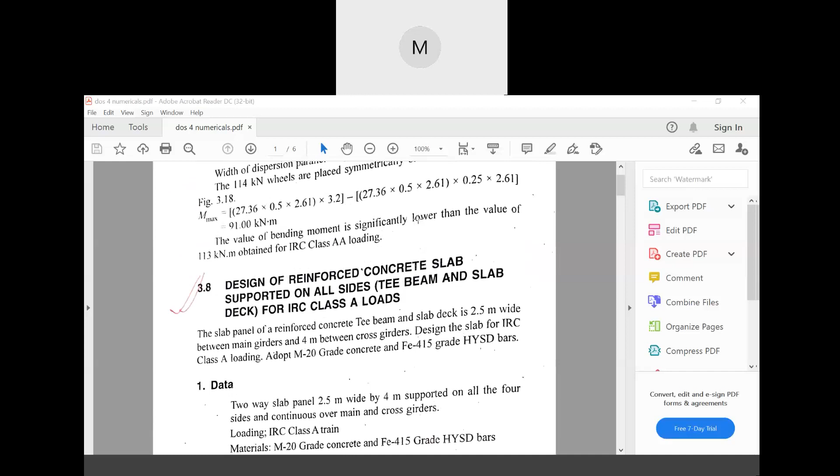Now, let us see here. Design of RCC slab supported on all sides for IRC class A loads. The last numerical was for IRC class AA loads, so this one will be IRC class A load.

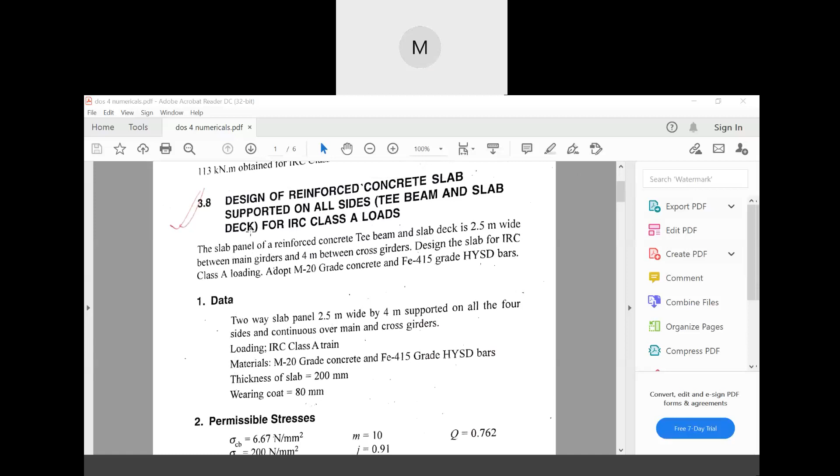So yesterday we discussed the data given, then the permissible stresses given. Now let us see, if you look at the figure, first of all what happens.

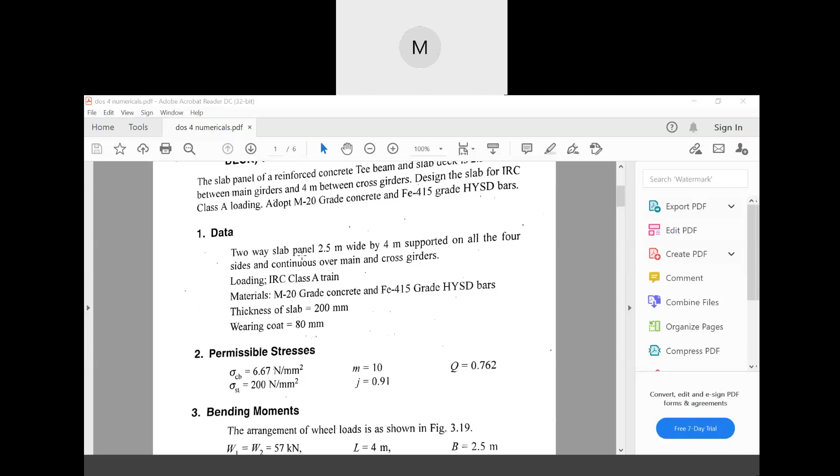So first of all, in this numerical, in figure 3.19, if you can see here, the IRC class A loading pattern - that means the two wheels will be like this, W1 and W2.

Okay, so this is the slab. Dimensions of the slab are given. Now if you can see here, this IRC class A loading pattern - this width, 0.66, 0.41, 0.995, everything - you will be able to find from the IRC class A load diagram.

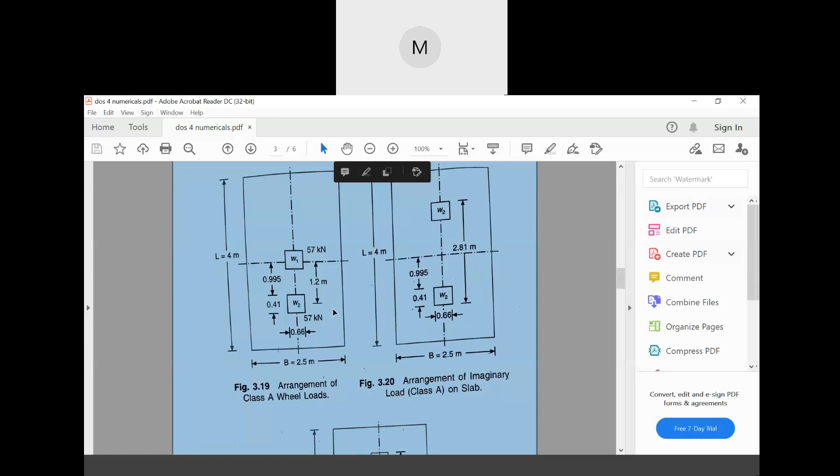Now in this figure, first of all, the W1 load is symmetrical - that means it is in between initially. But this W2 load is unsymmetrical, because it is in one part of the slab.

Now, for this, we will be considering an imaginary load W2 here on the other side of the slab, and then eventually we will find out for the whole slab in this manner. Okay, now let us start doing the numerical.

First of all, you have to find out the bending moments due to W1. So for finding out the bending moment for W1, you have to look at the Pigeaud's curve - U equal to, and V equal to. So U and V values you have to find out.

Just like we found out while doing the numerical for Pigeaud's curve. So this U and V, initially you find out, then after finding out U and V...

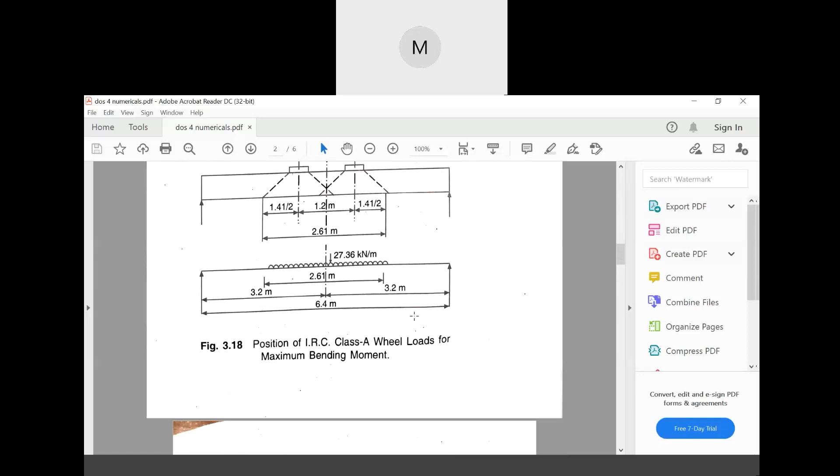Look, U will be 0.5 plus 2 into 0.08. Then V will be 0.25 plus 2 into 0.08. I hope you know why and how you find U and V.

Now from this we will be getting U equal to 0.66 meter and V equal to 0.41 meter. Now, for your convenience, you can just remember the small u and small v values for IRC class A loading, because the dimension of the wheel always remains the same - that is why you can just remember it.

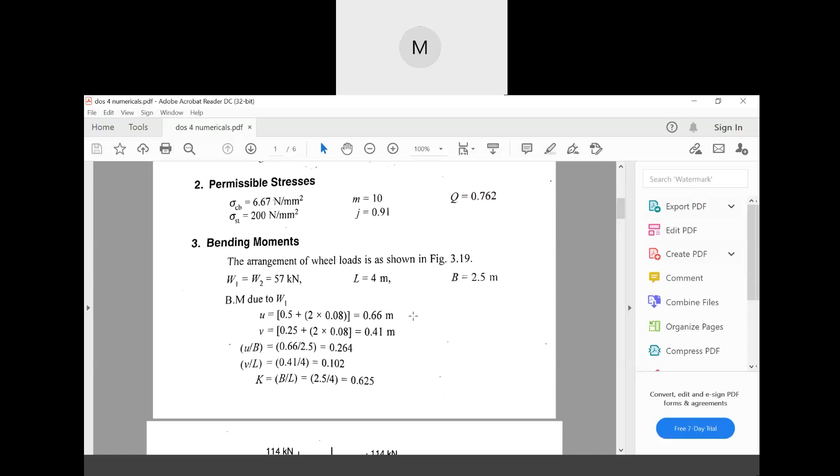Now, U by B ratio and V by L ratio you find out. After finding out U by B and V by L, you find out k equal to B by L. So please start noting it down. Once you are done, please let me know. Please start noting down this numerical.

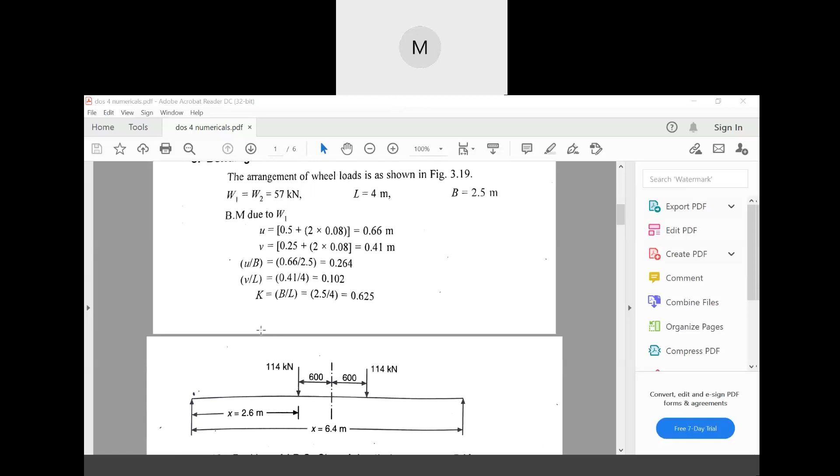So now after this, once you find out k and u and v, we have to find out small m1 and small m2. Now then Ma and Mb.

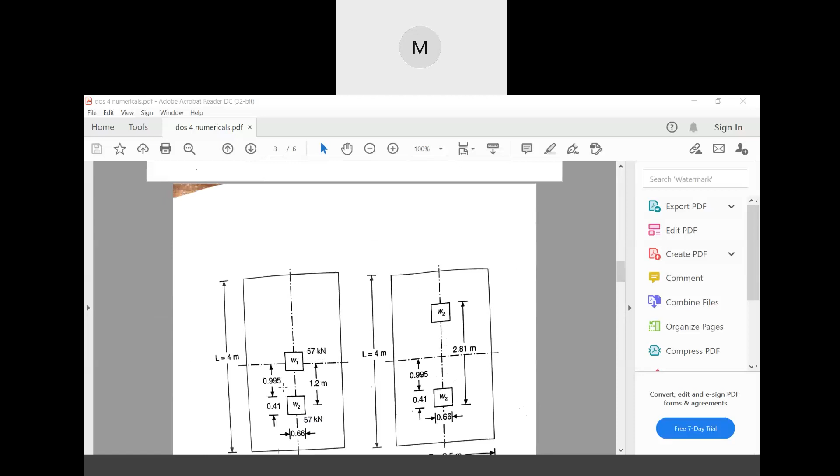Okay, so just try to find out and tell me the answers what you have got for this purpose. Then I will be sure that you are doing the numerical. Once you are done finding out q, find small m1, small m2, then capital ML and capital M.

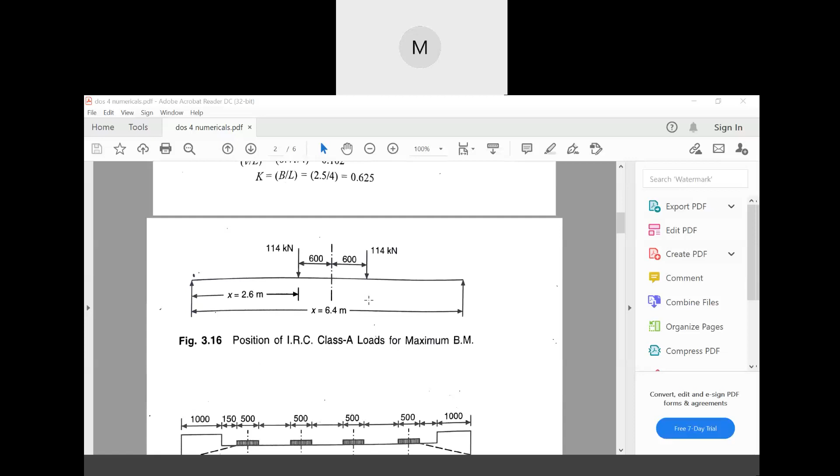So here is the diagram. Just have a look at it - figure 3.19, for the first case.

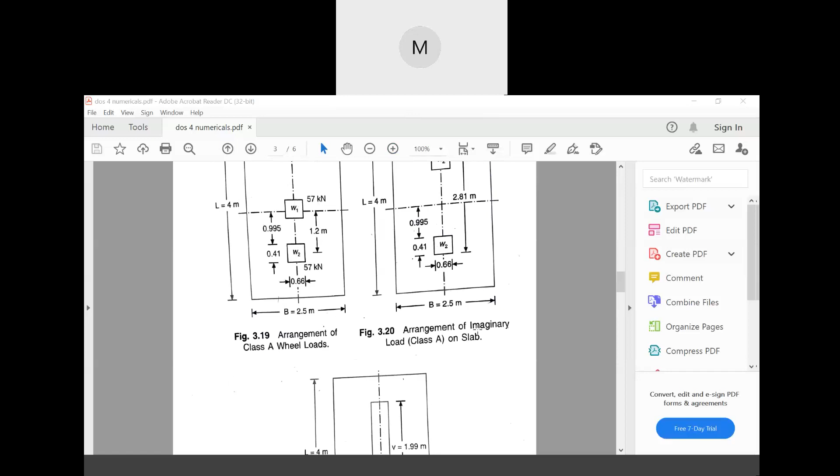Okay, seems like no one is interested except one. Okay, let's go to the next part.

Now, you find out the M1 and M2. Very good, okay, you got the correct answer. Now, once we find out capital MB and ML, this is for the load W1.

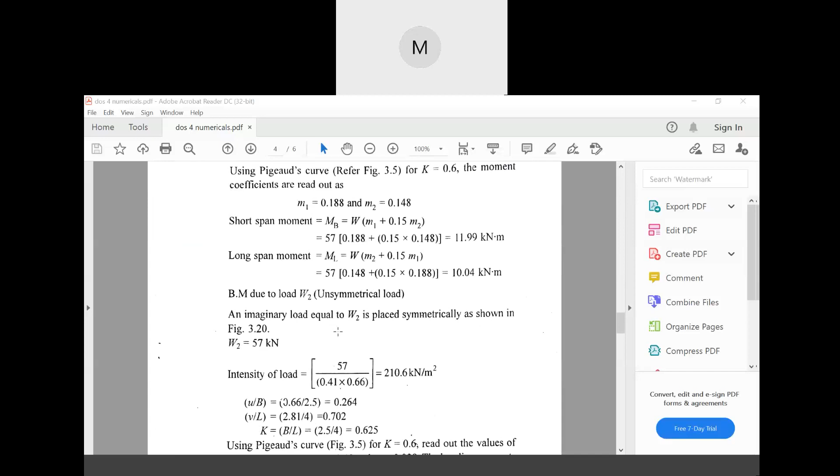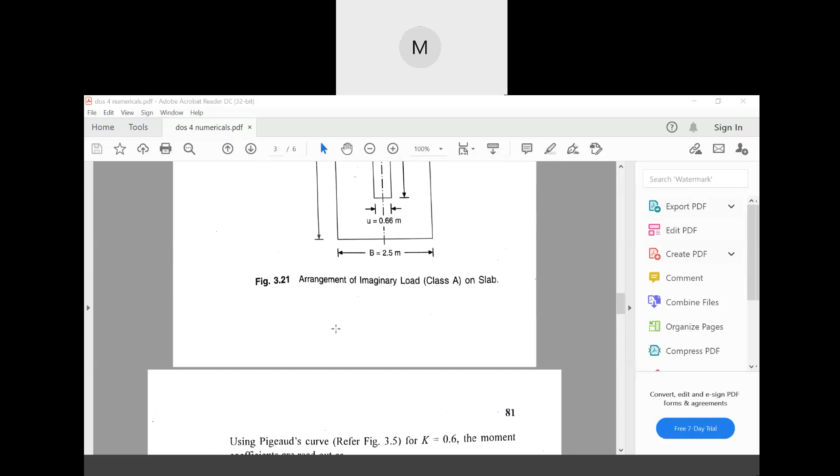Now let us find W2 bending moment due to unsymmetrical load W2. If you see here, the W2 was placed here, right? Now, in order to balance this, we place the W2 in another side also. We remove this W1 and place this W2 on the other side also. If you place this W2 on the other side, then this thing will be balanced, and then it will be symmetrical.

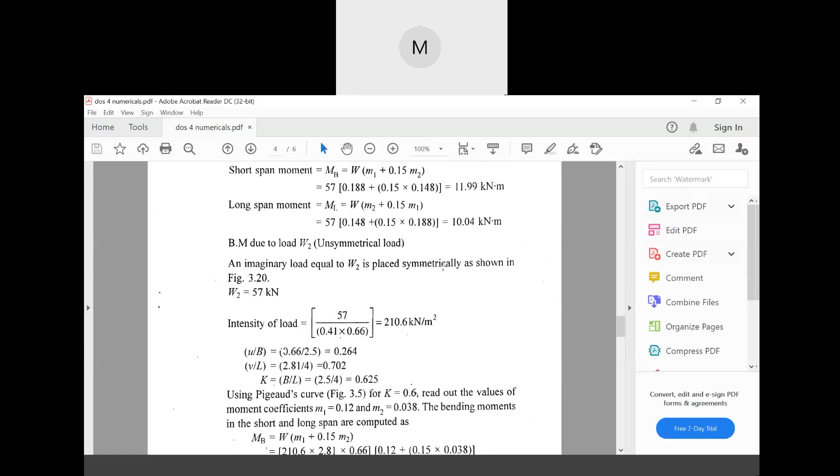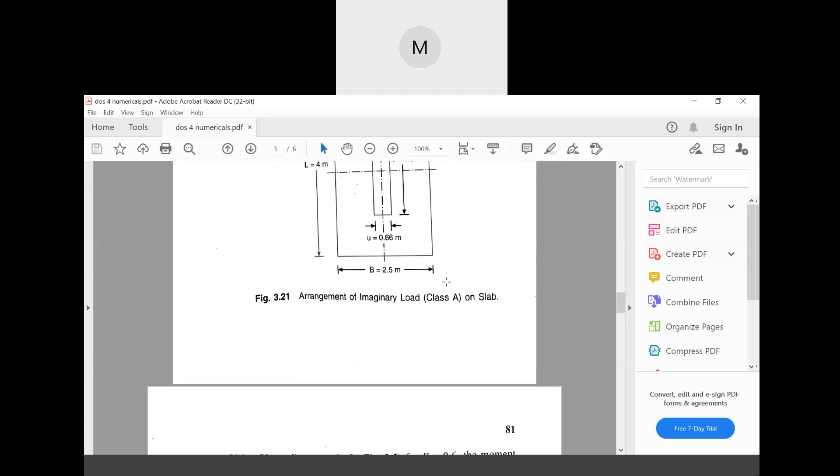Now, if you find out W2 here, while finding out this W2, U by B will remain same. Okay, as if you see the figure, this is U. This is U, right? This is U. So U by B, it will remain same.

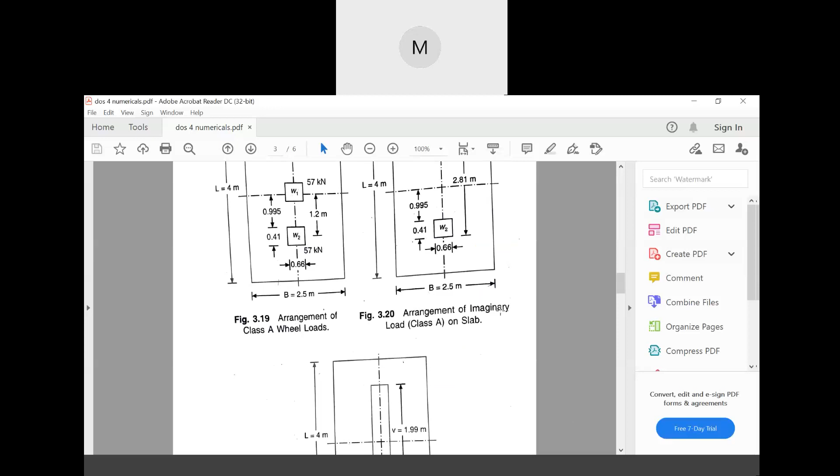But since we have put the load W2 on this side also, the distance between these two loads, this should be small v. So the difference here is only this one. So small v by L, so 2.81 divided by 4. This is how we'll find out small v by L.

Now we find out K, we find out the K value, and then similarly we find out MB and ML.

Now there comes the next step. Now look, you just try to learn the concept behind it. Okay, so now what happens is that we'll have to now look, MB and ML we got it, right? MB and ML we got it.

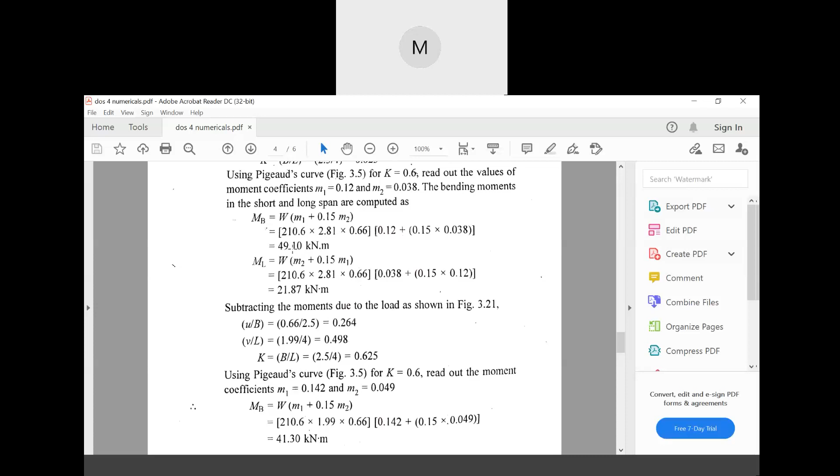We'll have to subtract one part. Which part will be subtracted? Look, now we found out for this part. That means what? For this whole part we found out, right? Now this red part we found out.

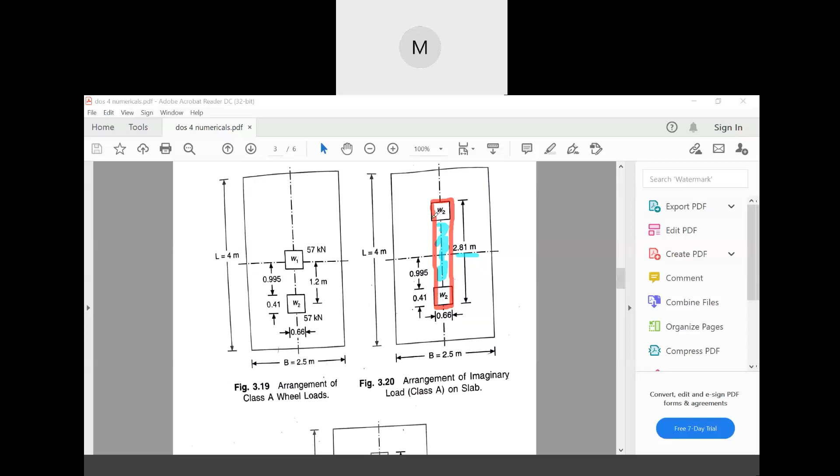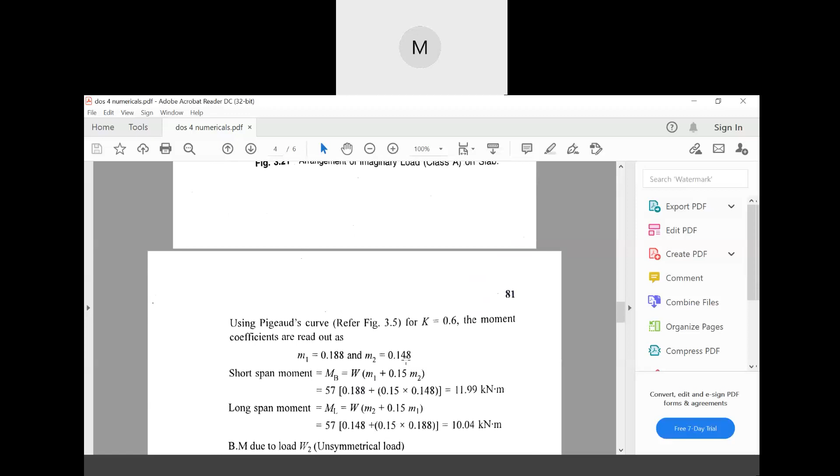Now what will happen? This blue part, this will be the extra part, right? That is why we have to subtract this part from this whole part. So if you minus 2.81 minus 0.41 twice, because this is also here 0.41, then you will get 1.99. So in the third case, the U by B or the U value will remain the same as 0.66, but the V value will be changed to 1.99. Okay, and then we'll find out again MB and ML.

Is it clear? I hope this is clear for everyone of you. Can someone please respond? Sir, please can you explain the third case?

Isn't it? But what we need? We need the ML only for this part and this part, because this part which is in between, this is not needed. The part that is shaded in green is not needed, right? So if this part is not needed, then what will happen? We'll have to subtract this part and the dimension.

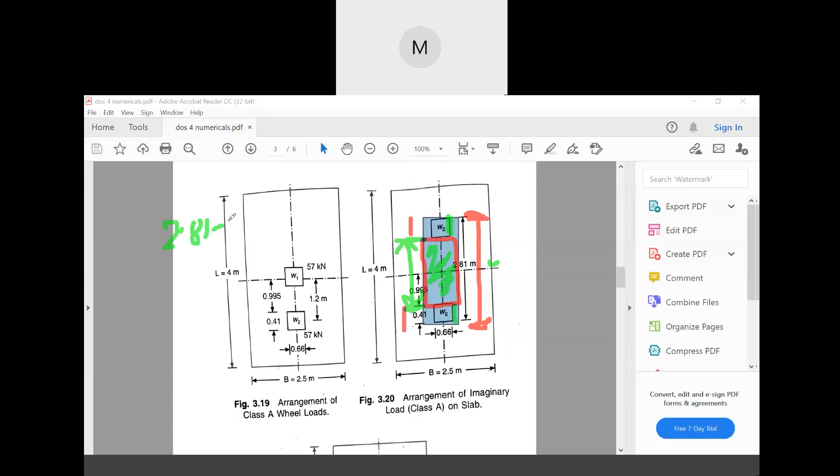And the dimension of this part, that means this one and this one, you'll be getting this how? If you subtract 2.81 minus this W2 this part and this W2 this part, that means what? It will be 2.81 minus what? 0.41 minus 0.41. It turns out to be how much? 1.99. Is it clear now?

Yes, sir, it's clear now. So after that, for this 1.99 part, in the third case, you'll have to find out MB and ML again, right? So you'll have to find out MB and ML again.

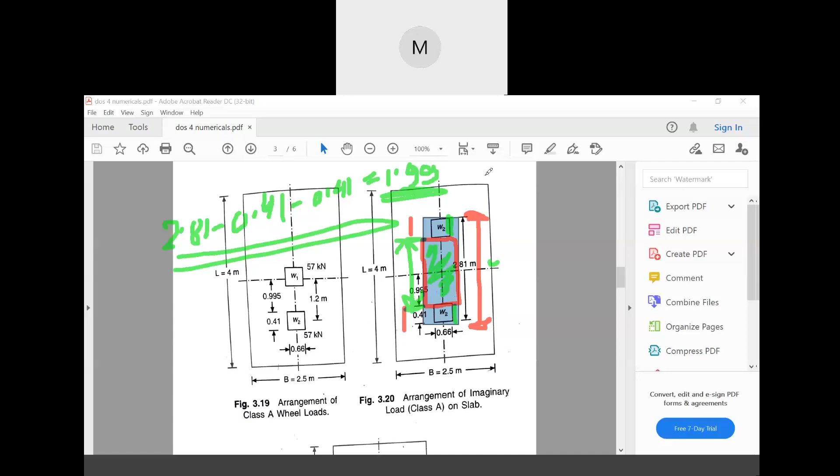So after finding out this MB and ML, okay, what you'll have to do is...

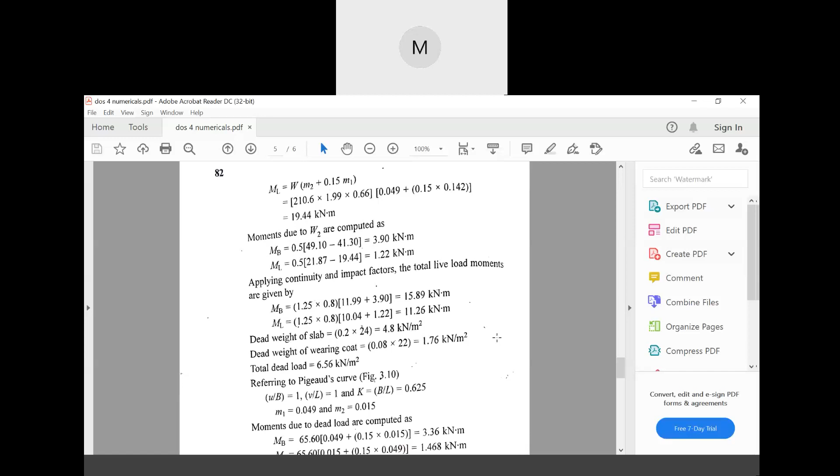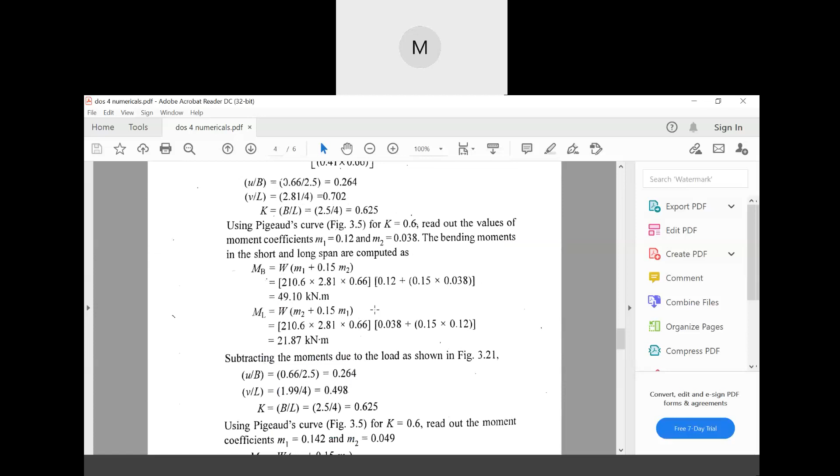You will be getting another value of MB and ML here. Now, what happens is that you will have to subtract this MB - this is the MB for third case, that is figure 3, and this is the MB for figure 2. That means for this part combined, this MB you will get, and you will get another ML here also.

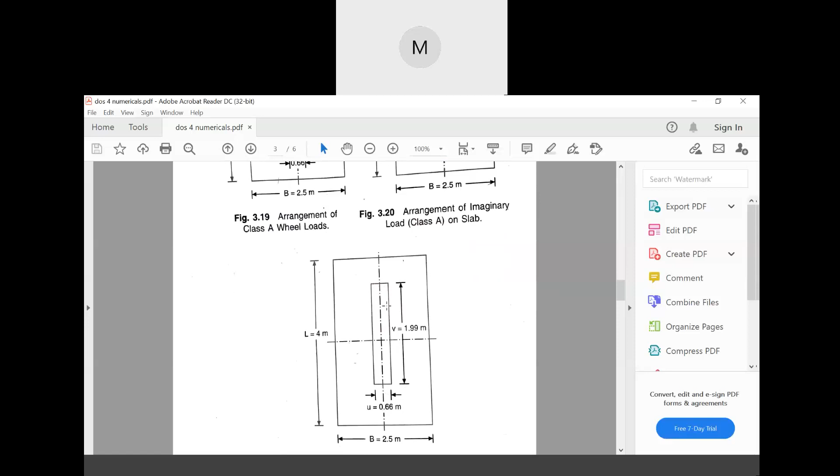And these will be bigger since the dimensions are bigger in this case. So the MB and ML will be bigger in this case, and the MB and ML will be smaller in this case, because figure 3 is only - figure 3 is somewhat like this. Wait, I'm going to show you.

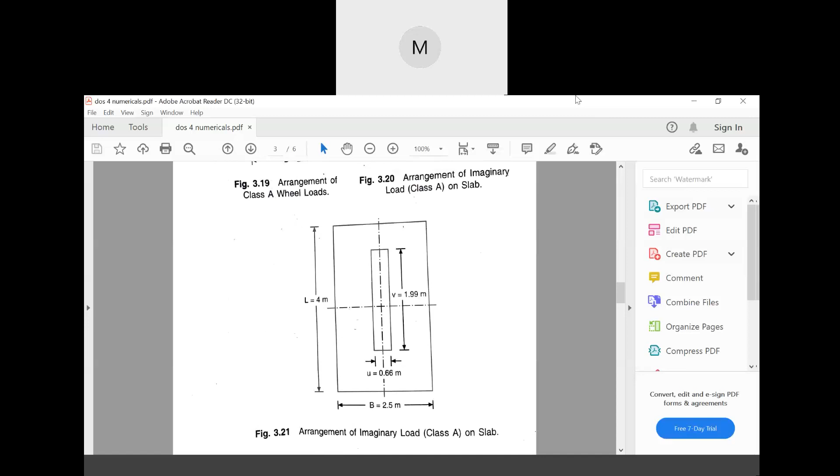In figure 3, what happens is that the W2 load will be here. So this is just that between part, right? So this will be less.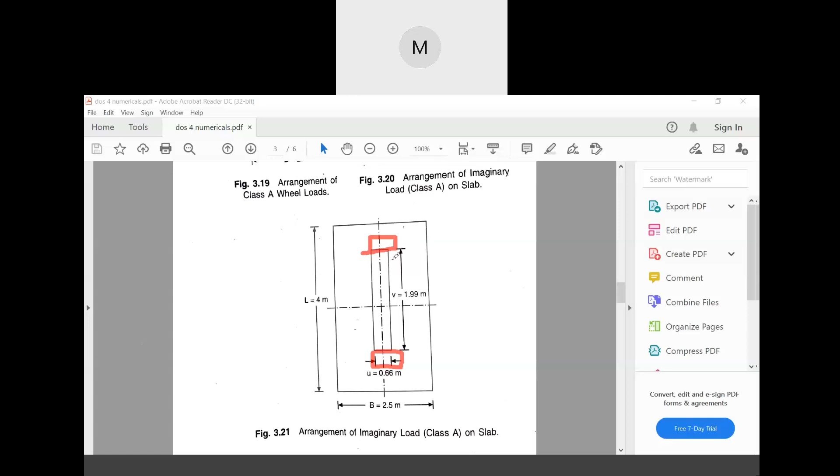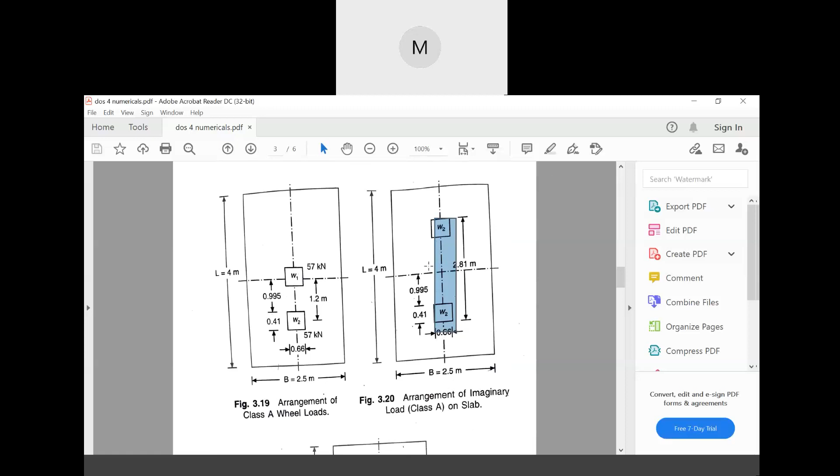So you found out the MB and ML for this part and MB and ML for this whole part. Now you have to subtract the MB of this part with the MB of this part, and then ML of this part with the ML of this part. And then eventually what will happen? You will be getting like this.

Now look, there is 0.5 here. Can you tell me why 0.5 is there? I hope this is clear, this subtraction part.

Can you tell me why this 0.5 is there?

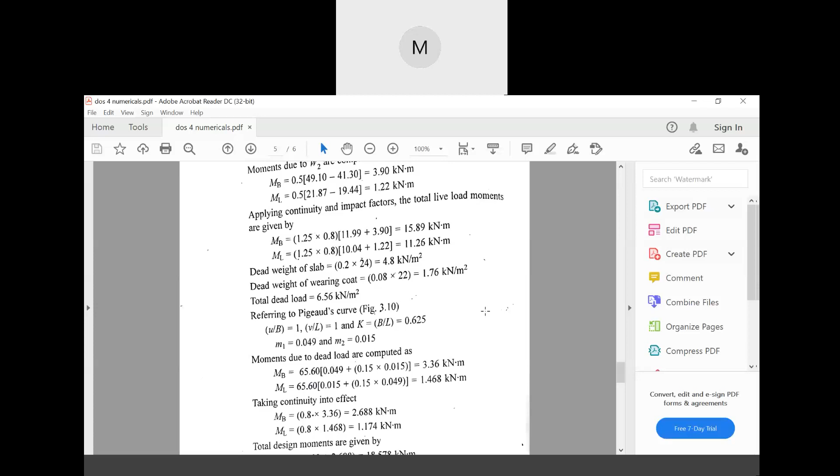Now moments due to dead load - this can be computed by considering the U by B as 1. That means for unit dimensions, because in this for live load we have the dimensions of the wheels, but for dead loads we can consider the slab as unit dimensions. That is, U by B equal to 1 and V by L equal to 1, and then we find out using those K.

Find out K, then small m1, m2, and MB and ML.

Then look here, in this numerical, after finding out MB and ML, the continuity is only taken into consideration, not the impact factor. Why? Why is impact factor not considered? Because look, dead load means what? Dead load is the weight of the slab, right? But in live load, when the wheel suddenly falls on the bridge slab, there will be certain impact.

But in case of dead load, there won't be any - or it will not be worth considering the impact factor. That is why we are not considering the impact factor.

Okay, so now after finding out the dead load bending moments, we find out the total design moments. Total design moments will be what? For MB it will be dead load and live load, and for ML it will be dead load and live load again.

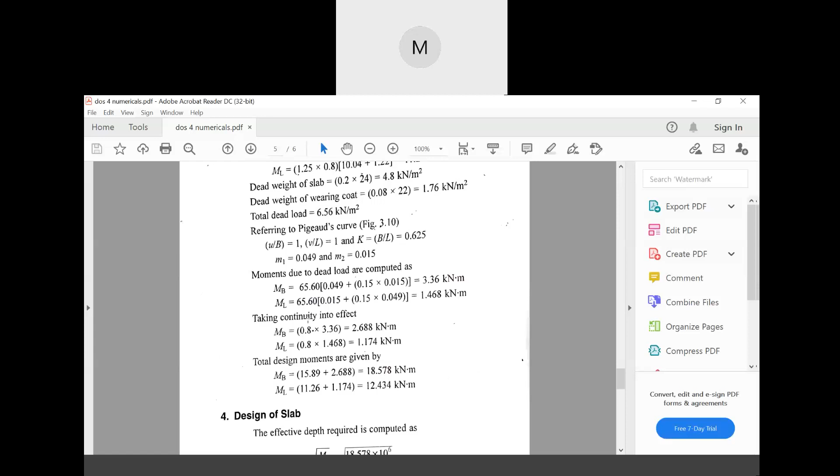Now for designing the slab, we find out the effective depth, then area of steel for MB, and then effective depth and area of steel for ML. That's it, okay. So this is how we will be computing this kind of numerical.